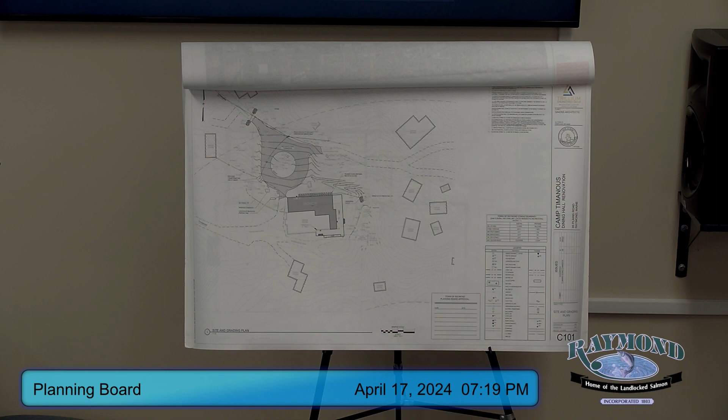So I know we've covered what we're talking about doing, and I just wanted to talk a bit more about why. Basically, the gradient at the back of the existing building — this is the existing barn and dining area, and the kitchen is located here. It's essentially a hill that runs down towards the existing kitchen with the outbuildings they have, the detached buildings Garth mentioned, the freezer and things like that. And the way the grade works now, everything essentially comes into that existing area.

So we have some rotted sills, and some old timber piles — basically old, not quite telephone poles, but round support piles. We're going to be replacing that in the main barn and also in part of the dining hall. We're going to a slab on grade, which gets rid of that wood timber sill condition, and that's really going to help us. We've also revised the grading at the rear of the building with this new kitchen expansion.

The other reason we were involved is that the way trucks come in now isn't the best way. We have box trucks for deliveries, and also some tractor trailer trucks for food deliveries. Since it's camp road, we want to make it a little safer — that's the reason we're putting in this roundabout. We started with a bigger truck design and can barely squeeze a WB-53 in, so we're really looking at more like a 45-foot trailer.

I know the fire department was concerned about emergency turning radiuses, like a 40-foot diameter, but we do have that — we can get a 45-foot diameter for this. There's an existing building in the center of this area; it's not quite as defined as this roundabout is now, but it will be defined. That building in the center will be relocated during this transition as well.

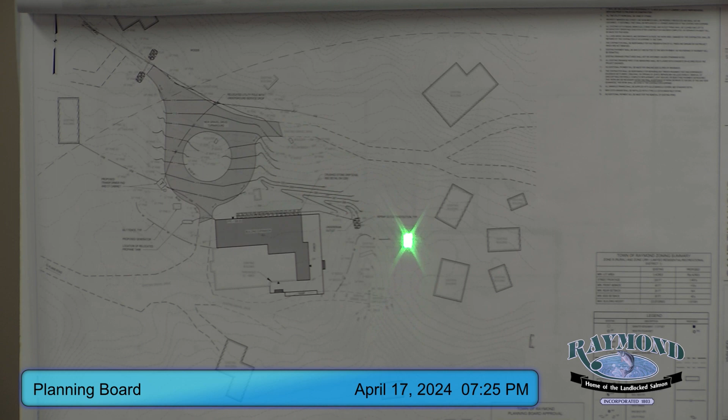And put some riprap in there so it gives you a little - with gravel surfaces, even though we have, what happens in this particular case, you have gravel surfaces, but you have these pine needles that end up coming in and actually helping out the situation. So you have a pretty well compacted surface, and then with the pine needles, kind of gives that campy look. There's a lot of pines there, and we're trying to retain those, and they also help with the gravel in general, maintaining that. With gravel roads, unfortunately, you're always going to lose a little bit of sediment here, especially in very severe storms, but we're trying to use that riprap to retain some of that sediment so it doesn't get washed downstream.

Okay, Jim, we don't need a phosphorus study for this? It's in the shoreline zone. That's one of the questions I had in the memo - has any other work been done since 2005? Only that it would trigger if they went over 20,000 square feet of new impervious since 2005, it would trigger a DEP permit. I think here where we are in the shoreline zone, I think it is fair for the board to ask that at least the modifications and improvements they've made address some kind of treatment.

And there's two ways we do that: either you can follow the DEP measures, or you can implement our point system that we have within our ordinance. So that may be something we want to look at. If you're not triggering a DEP, we will want to see that there's adequate protections. They do have them, but I can't quantitatively tell you how they match up. You do have a drip edge for the roof, you do have some diversion for the road, and maybe that riprap protection becomes a level lip spreader or something like that. So if you look at the point system, there's credits for improving things, and then there's credits for doing actual treatment, and you have to hit 50 points.

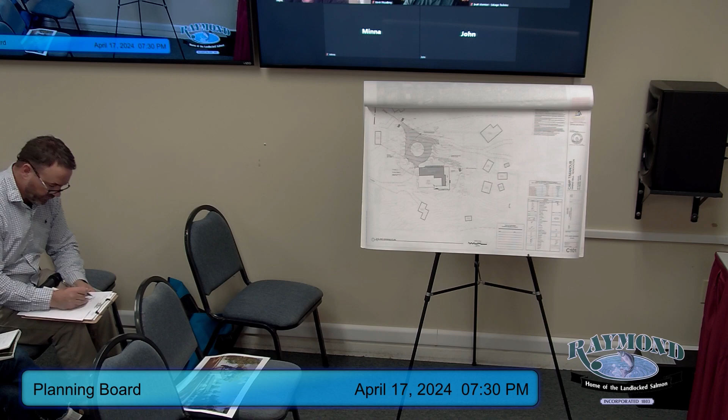We'll have the shed actually repurposed, and we will have the power service trench coming in underground, and then a pedestal right in there. We'll have boulders to protect the top edge of the turnaround and the power service.

Because this one shows the transformer outside the circle, but you're saying it's going to actually be inside. Yeah, that's probably a change since then. That's fine. I was just wondering, if the truck were to go off the edge of the gravel surface, is there a little more wiggle room with the radiuses and things? I know it's tight, but if somebody were to make a mistake, is there enough room to give them a little give?

What we've seen in the past is the issues are not with the road for delivery trucks, but with the trees. So we've cleared the trees around the perimeter. There's significant scraping and scarring, with truck drivers just not able to quite navigate that. That was a significant concern we feel we're addressing here. So you get stuff from the top and branches from down low. I understand, and actually hitting the sides of the trees—it was very tight previously.

Where you show the under drain outlet, there's a swale coming from near your turnaround, and there's also a swale coming from, I guess, the east or northeast, coming straight down to under the footbridge and through the 12-inch pipe. Do you anticipate any additional water going through that?

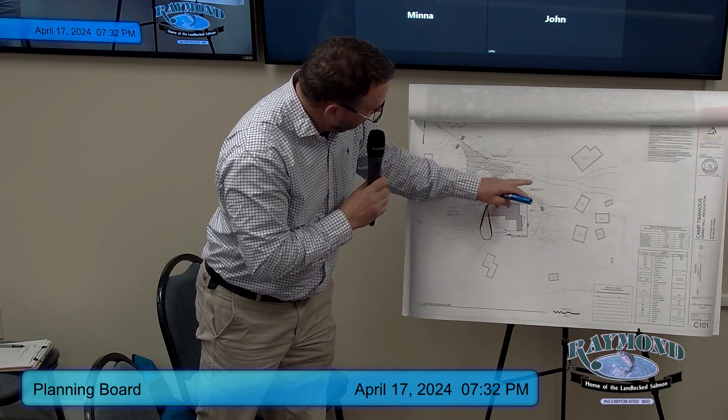Are we talking about this side, the lower one? This lower one, right there, that culvert right there? It's an existing culvert and swale right now, it looks like. There's a swale that basically flows down through here, picking up some of this surface water and stuff like that. I think the amount of drainage we're talking about is minimal, and we haven't had issues with this particular culvert. It's got essentially a riprap outlet to slow it down before it meanders down.

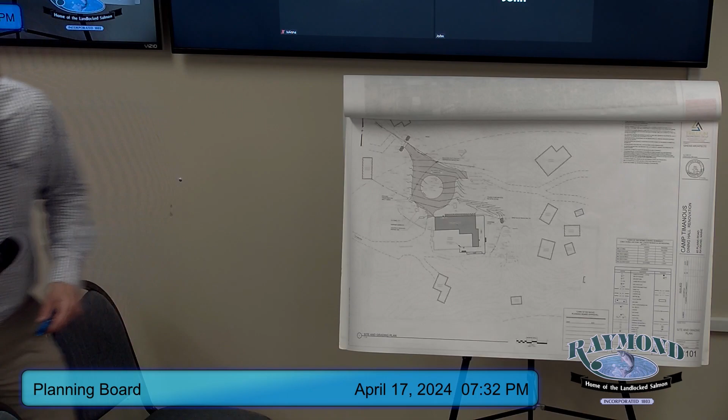And where does that outfall right into Panther Pond? It goes over essentially grass, pine needles, things like that, with a ditch that essentially exits down to Panther Pond. Which is, the distance to Panther Pond is what, probably 300 plus feet?

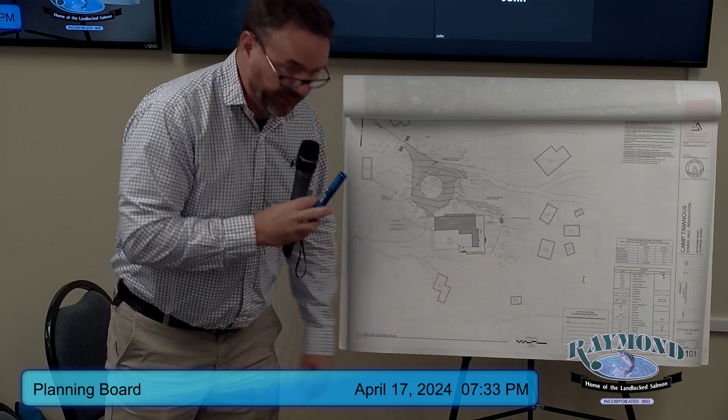Yeah, from here I think we're around 250. I think that line on the bottom is 250. So roughly around 300. Probably a little bit more, actually, probably close to 350.

That's a fair distance. And that's existing - does that channel run all the time, or is it just seasonal? I know it's running now. A typical summer, it's dry. Last summer, it was wet most of the time. So it's not like a permanent stream, it's more like a seasonal swale? Correct.

We doing? I'm good. Good? Good. Good? Yep. Good. Kevin? I'm good. Okay, so question, do we want to do a site walk?

Chris, do you have anything? I was going to say it probably would be advisable to do a site walk, to look at the swale, look at the site. I'm totally in agreement that they're doing a wonderful job to preserve that old barn structure. I've been in that several times, and it's just the character of the camp, and I'm so glad that they're going to try to maintain that. And I'm all for the project, but I think a site walk would definitely benefit the planning board.

What do you guys think? Yes? No? I think it's, I'll go. I want to see the barn. You can see some history, like come on, posts and beams. No, yeah.

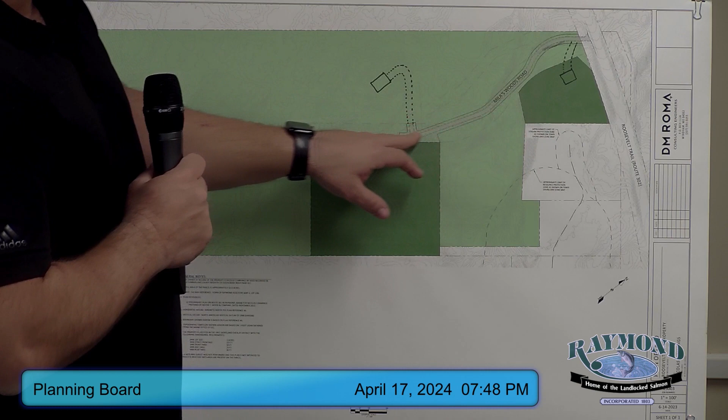When they purchased this property, they divided this lot off from the rest of the land. There's currently a home being built on this property, and this is a shared access driveway. There's a second home under construction here. So we've got two single-family dwellings being built, and this was approved essentially as a shared driveway coming in. This is all built out to a subgrade material at this point - it's drivable, they've been able to get materials in and out, and do inspections with the town.

This home is substantially built, and this one is well underway as well. So when we became involved in the project, that's kind of where things stood. These two homes were under construction, and the roadway had been roughed into a subgrade level with culverts being placed.

So we came in and surveyed the roadway to establish what was built out there for grades and limits of the site disturbance for the driveway area. We looked at the ditches constructed along the sides. There's a rock retaining wall built along this area to accommodate a grade that comes around the corner. There's a wet area here on the side of the road, basically a standing water pond area that drains out with a culvert.

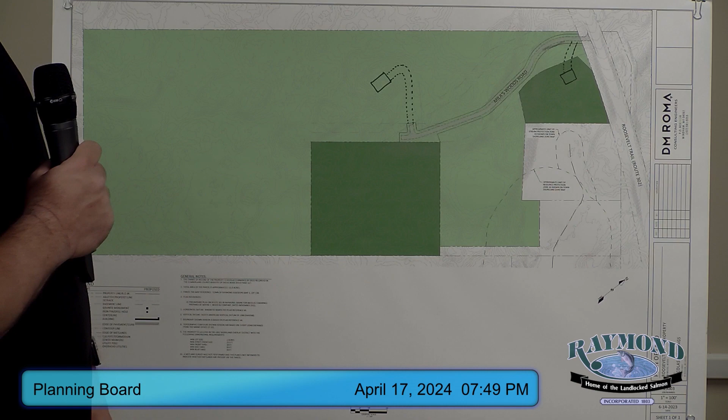So that's what was there when we became involved in the project, and we started talking about what would be necessary to improve this beyond a driveway to the house, so it could potentially provide access to this property, and in the future maybe to another lot. So we designed the road keeping in mind the standards for up to 10 lots, which would be a 22-foot wide surface, 16-foot travelway, 3-foot shoulders.

And trying to maintain the grades that were there. Understanding Jim's comment here tonight, it looks like we may have to revisit those road grades.

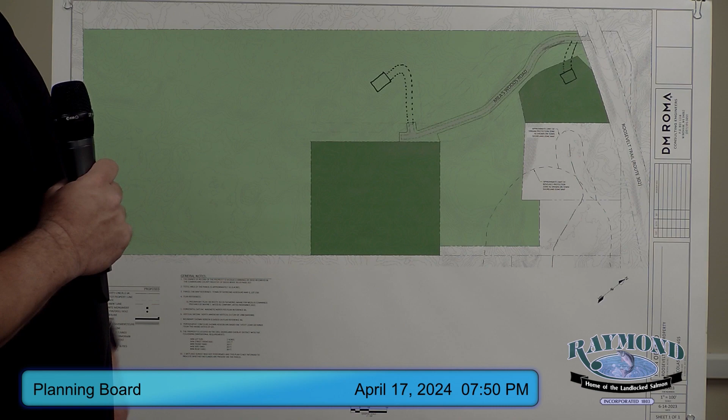Yeah, and that's really why he had paused in building out this road. It doesn't have the gravel placed in there yet, and he wanted to take it through the process of a private road approval before he placed the gravel, so he wasn't having to go in and redo a bunch of stuff. So that's the pause in the road construction at this point. Originally thinking he would wait, but at this point it makes sense to just have it built and approved as a road here before gravel's placed.

So we've received the comments from the fire department and Jim's memo as well, and some of the introductory comments we've heard here tonight. So I think we've got some things to talk about with staff, just to clean this plan up some before we come back and talk about an approval. Certainly looking to get any preliminary feedback you may have at this time. And again, we won't go through line by line all the items in the memos—we can work behind the scenes to address those.

So Dustin, is it basically a three homes subdivision? Is that what we're looking at? Yeah, what it would be right now is, if the road is approved and built, then it would provide access to this lot as well. So a home could be built here, and there's already two being built, so conceivably over the next year or two there would be three homes, and maybe potentially more in the future. All owned by the same person? Yeah, I think the intent is that these would probably be sold once it's built, so they'd be saleable lots with homes built on them.

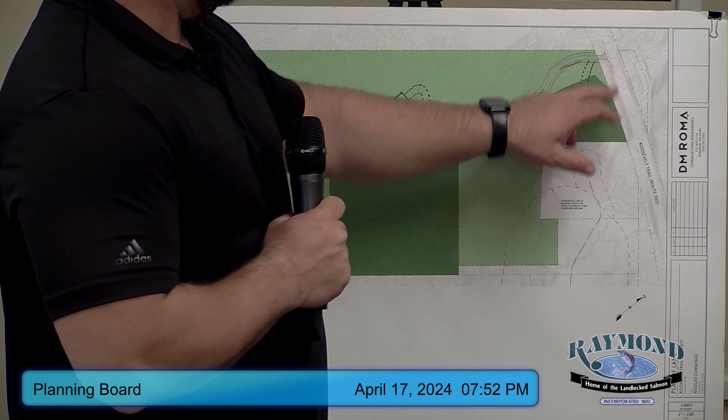Right now, are we looking at like a backlot driveway? Is that how this has got set up? I mean, right now, this lot has the minimum frontage required on 302, as does this lot. So what we're looking at right now, without a road approval, is a shared driveway on two legally conforming lots with frontage on 302. So it's basically just a split shared driveway, with no standard that this needed to be built to. Yep, but in order to make it eligible to be a private road and provide frontage and access to this lot, we've got to improve it beyond just a driveway.

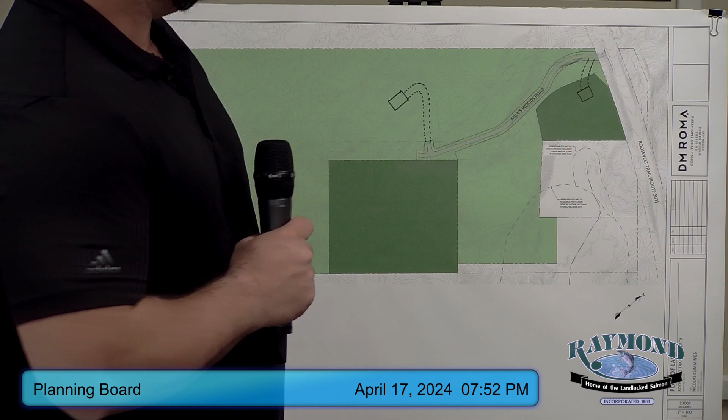And these are the limits of some of the resource protection areas that are in the shoreland zone. So even though it's kind of off the property, we wanted to overlay that information on here. We've got basically standard shoreland zone across, but these are the resource protection areas on these adjacent pieces.

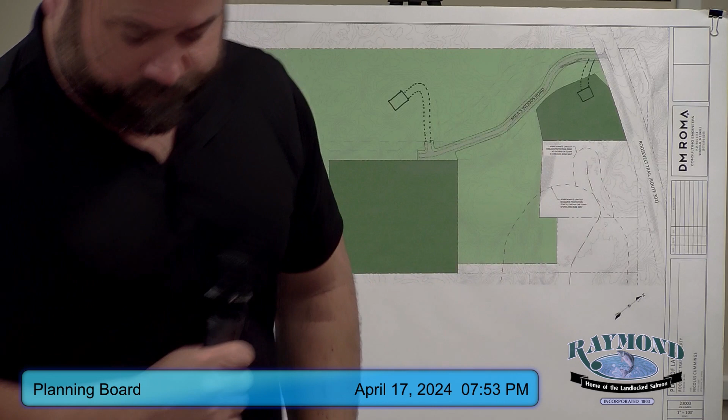So, Mr. Chair, if I may? Yes, go ahead. Dustin, this previously had a stormwater permit, is that correct?

I believe it did. And has that been, so where would it be with the DEP? Is that expired or rescinded? Because I know some of these things with the DEP don't necessarily go away, so I'm curious to know where the DEP is with this. We're somewhat close to a stormwater threshold here anyway, but I don't know exactly what the numbers are.

So we designed the roadway to be under the 20,000 square foot impervious limit based on the length. We also took into account the entire gravel surface, not looking at it as a driveway that has new impervious going to a road. It's all recently built, so we just looked at it all as new area for that 20,000 square foot calculation.

I don't know the complete status of that DEP permit. I can go back and look. It's been so long that all of the Chapter 500 rules have completely changed. I don't think they would have any ability to go in and build that over. The other question would be, to your point, if it's all owned by the same entity, then they could possibly pull those homes in as well, not just the road.

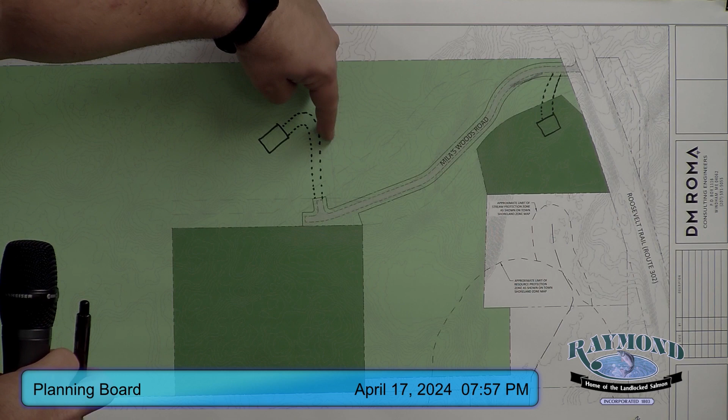The plan shows overhead utility lines for electric. Will that be put underground? It seems like they're going to be in the way of the road. So the overhead lines are already in. The primary is run all the way to where that new house is gonna go, right? Yeah. So overhead primary ends here, comes all the way down the road up to this point, and then it goes underground from this pole into the building.

So essentially, when we get to that point, they'll have to request, ideally, we request a waiver, because typically a waiver, but they're installed. I don't know if you want to make them tear it out and put it underground, but maybe after this last storm, they might want to think about it. But utilities are in, basically. And they'll be within the right-of-way, the poles? Yeah, the poles that are shown on the plans have all been surveyed, those locations.

So again, regardless of whether it's a DEP, we'll want to see some methodology as to how you're handling phosphorus or runoff. Yep. There's a lot of wooded area on this lot. It's a big parcel, and the road is kind of running right down through the middle, so we're not right up against property lines. So we can certainly establish a criteria for how stormwater can be managed on site through buffers, forested areas, and conveyances.

Wayne, while you're there - I know we're over 1,000 feet of road here, we're like 1,200. Do you have a preference of 2 turnarounds versus 1? I think under our criteria we can grant a waiver, but there's other things we can do with pull-offs and areas, things like that. I don't know if you've had any discussion yet.

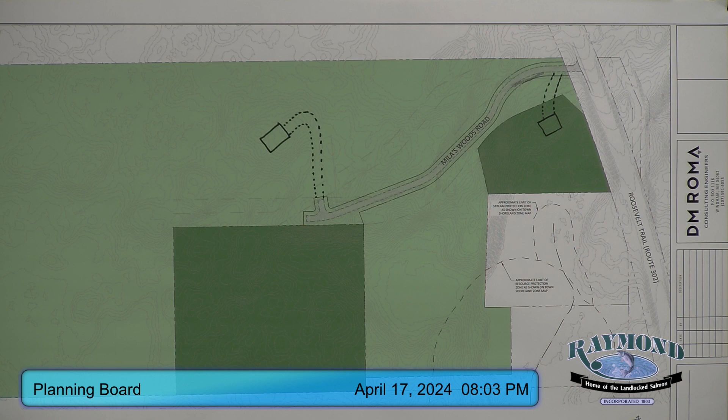I'm just - up to the board - but I was thinking, is the site walk better after we have more road to look at? All we're really looking at right now is we're not looking at a subdivision, but I think the road alignment is basically in place, so I don't see any reason we wouldn't want to do it now. You can see it in the raw condition.

All right, whatever - I think the sooner, again, the better. Sooner is better? I think so, yeah. All right, sooner better. You want to do it that same - no, we can't do it the same night. Do it the same week. Yeah, it'd be too dark.

Back to the calendar. I don't know if we got another one after this that Dustin's doing as well. I don't know if you want to go back and revisit that one. We could do both the same night, they'd be quick I think. Yeah, this one will be extremely quick. Yeah, the other one for Alfred Mann, we could wrap up too.

Same week, sometime the 8th, we got planning boards the 7th and 9th. We're gonna try that, either one's fine with me. Bob, you don't have a meeting the 8th. We canceled that. Oh that's right, we don't have a meeting the 8th. So you wanna do the 8th? You already got the 8th planned, let's do the 8th. Okay, that works for me, yeah I can do that.

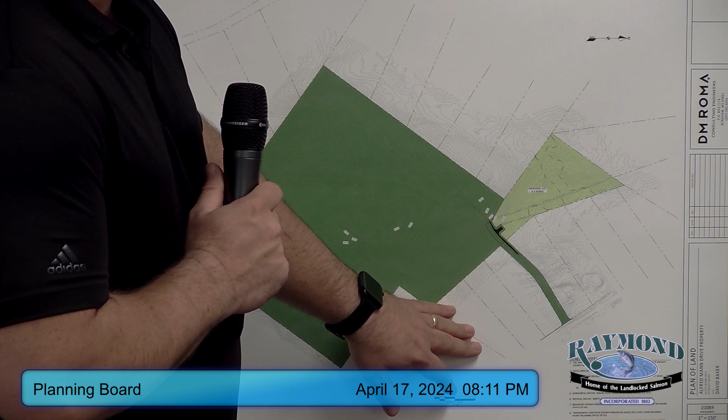Sure. Dustin Roma with DM Roma Consulting Engineers. The subdivision that Jim was referring to, which basically created this Alfred Mann Drive roadway to its current terminus, created these lots going down 121. So each of these lots was a lot in that subdivision, and then there was this 50-foot wide right-of-way that ran to the back of that land, and then this was a separate parcel on the back side. So this dark green parcel, together with this light green area and the area that we're showing as this new right-of-way, that is the current configuration of this parcel.

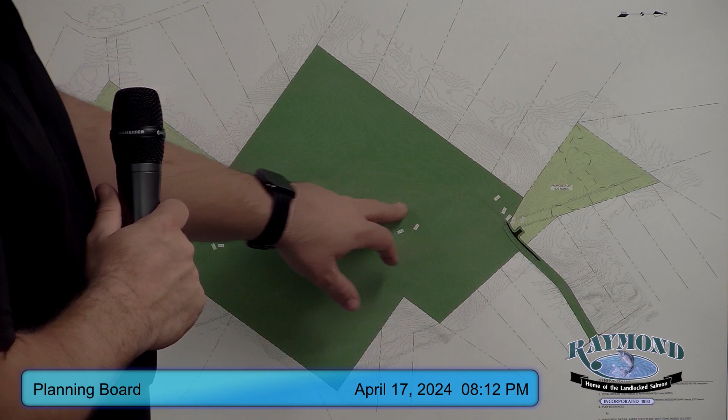There is a separate parcel back here that has a right-of-way off of, I think, Oak Ledge that comes up through here. So there's an access point here, but the true access to the existing single-family home on the property is off the end of Alfred Mann Drive, and this long driveway that is paved up to a portion, then somewhere around here transitions to gravel up to the top of the hill, and then it's paved again up around where the home is.

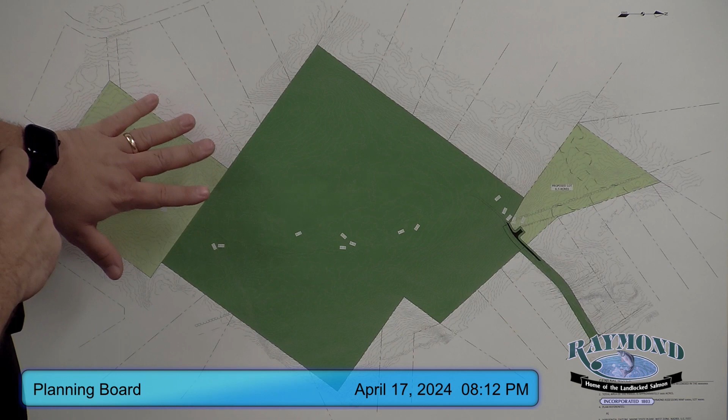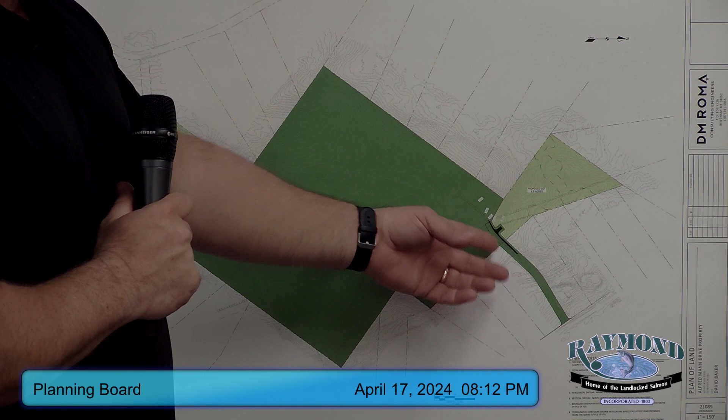We've actually been working with code enforcement for some time to try and remedy a long standing issue with this lot and to provide it some frontage. So we're working on a scenario to basically reconfigure the lot lines between these two properties to give this lot frontage on a new road. It's not something I drew up on this plan, but it's something we've been working with Chris on. I didn't want to complicate the issue here tonight, given the history we already have. I just wanted to make the board aware that that's one of the accomplishments of this road, if we can get this approved as a private way extension—that would give us the ability to then reconfigure these two lots so that they had the frontage they needed.

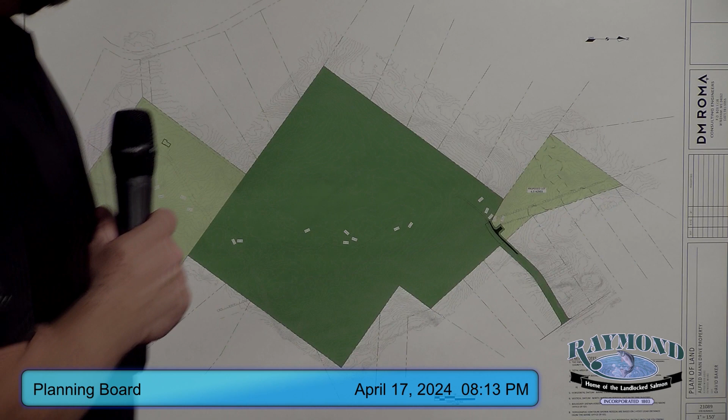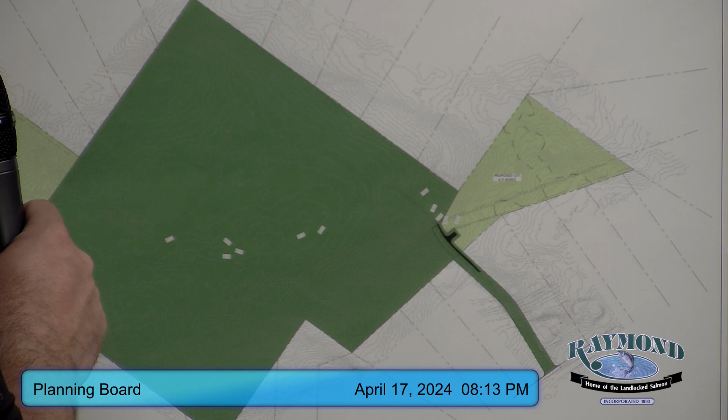This light green lot is an actual proposed lot that we are looking to divide off from this parcel, so that this one parcel would become two. The extension of this roadway would provide access to this new lot, and then the remaining land, as well as a reconfigured configuration to provide access to this. So that's where the 3 lots come from, for 3 additional new lots for this road extension. There's currently a single family home here, another one here, and then the duplex here. So there's 3 lots accessing Alfred Mann Drive, and this being the 4th, with one of those lots being a duplex.

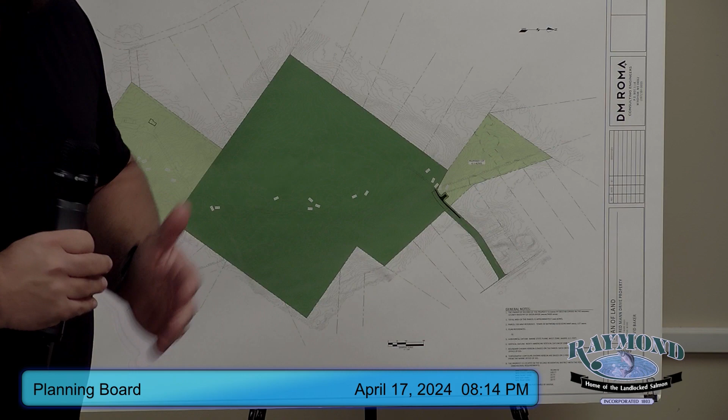What we're proposing for improvements, on the cross section, is a paved road, and we're only adding shoulder on one side, but currently that road pavement does have about a foot of shoulder on either side. What we're looking to do is only disturb one side of the roadway and not widen it in 2 directions. So we're looking to maintain the foot of actual gravel shoulder that's there, the 12-foot or so wide paved surface, and then extend the gravel shoulder on one side only, so that we've got a total roadway width of 22 feet, with the pavement off-centered from that 22-foot section.

And then are you going to pave that? The plan is to keep the pavement that's there now, but the area that would be widened would be a gravel surface road, because I think the standard for this type of road would be a gravel surface. We're not looking to remove any of the pavement that's there—we would just keep the pavement and widen the gravel surface on one side.

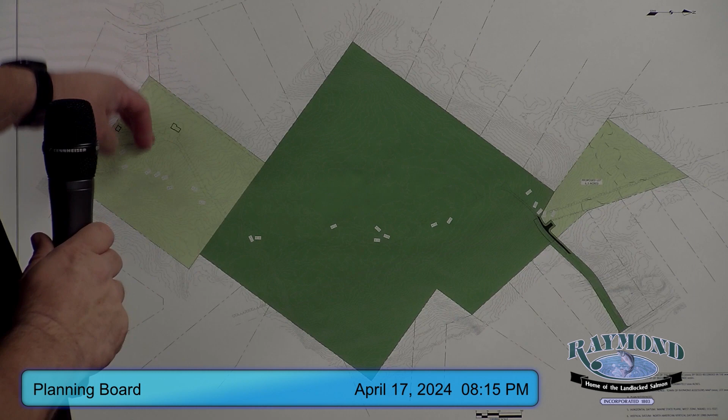And then we've got power that would need to be run underground, continued up through to serve this new lot that we're proposing. The power for these existing homes here actually comes in this way, so there is no power currently running through - this is at the end of lower Alfred Mann Drive, right, to that duplex?

Yeah, exactly. So we would extend it up. Is that overhead or is that underground? I think it's underground, I don't know, because it crosses the pipeline, so I don't remember. There's a gas pipeline on the lower section that it crosses, and then right where they're doing the terminus, there's an electrical power line.

So it crosses. We currently have overhead power coming up the road. The plans as we've laid them out now are showing overhead power, but one of the comments that Jim brought up is that we need to coordinate through CMP - if they would even allow overhead power to extend beyond, which would cross their power line. So we may need to go underground anyway for that. We'll certainly get that sorted out.

You might be able to get up underground to that power line, but then you may have to drop underneath that, that's all. Yeah.

So it is a fairly short road extension on a road that already has a road construction permit for an extension previously, but we understand the layers of history and complication here, as well as letting you know that there's other things going on behind the scenes other than what we're asking for approval on for the private way. Any questions you have about any of those items, happy to answer them. But we were trying to keep the items separate - let's address the private road extension, and then we'll work on reconfiguring those lots, as well as looking at some potential development of that lot that's being divided.

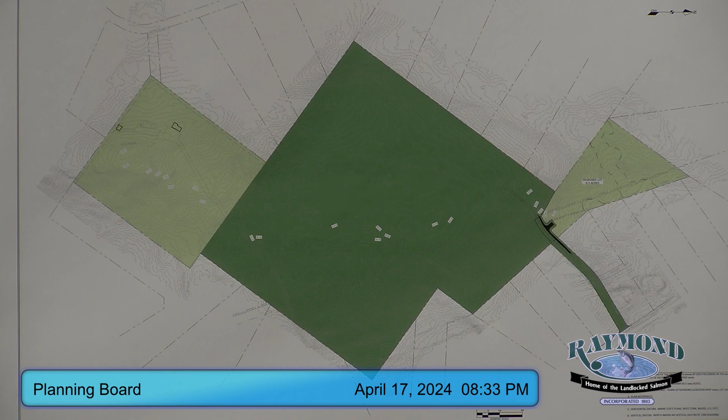Thank you. It sounds like you have a couple of different batches of pavement on that road. Is there any way to confirm that the pavement is good or meets standard? We'd probably want to do a test pit or some borings, I think that would be the best way.

When we got approval to split the lot previously, we had gone through and done some test pits along the shoulders of the roadway just to establish gravel depths and all that. The pavement surface that was there at the time was kind of above and beyond what's necessary for the road standard for the number of homes it serves. Not looking to remove it or anything, but what we looked at prior was that the width and depth of the gravel was sufficient to meet what the town requires for access.

In this case, the driveway we're converting to a private road, we just need to confirm the base is at least there. We don't require pavement, but we should make sure the base is adequate, that's all. So we'll probably need some additional test pits along that section of road that we didn't look at last time.

Okay, any other questions? Are we doing a site walk now? I think it might help you understand some of the lot configurations at this transition between old and new, old subdivision line and new single-family lines. I think it won't take very long, but the site visit will be very beneficial to understand what's going on.